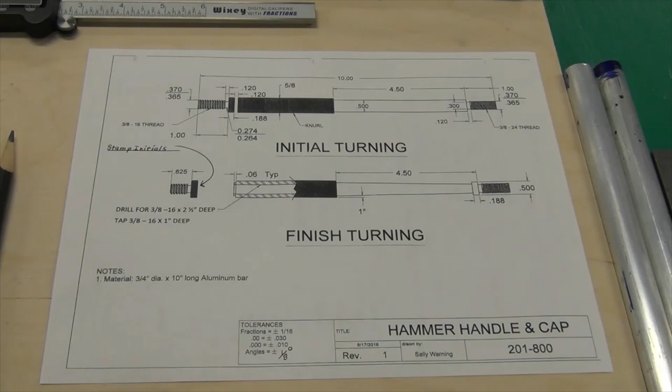In all machine shops, they have decimal equivalence charts hanging up throughout the shop. This is one of the two that we have hanging up in our shop, and the information we need is right here in this location. For drill and tap size is what we need to know, as far as the drill size to use for this tap tool we have on our print.

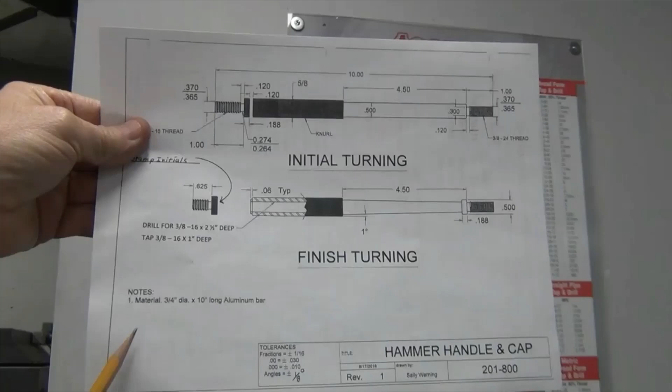As you can see, it says drill 3/8-16, 2.5 inches deep, tap 3/8-16, 1 inch deep, but it doesn't give out the drill size to use. We go to a decimal equivalence chart such as this to look up the information.

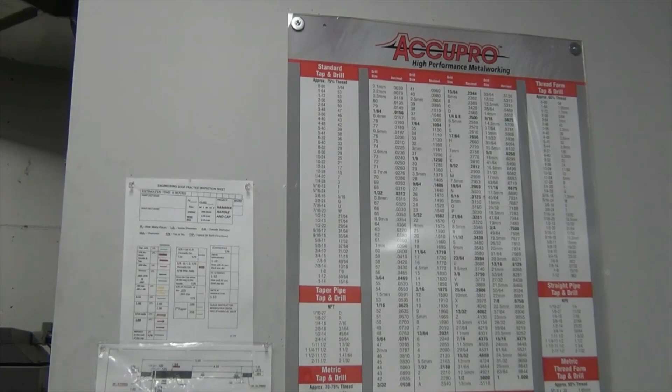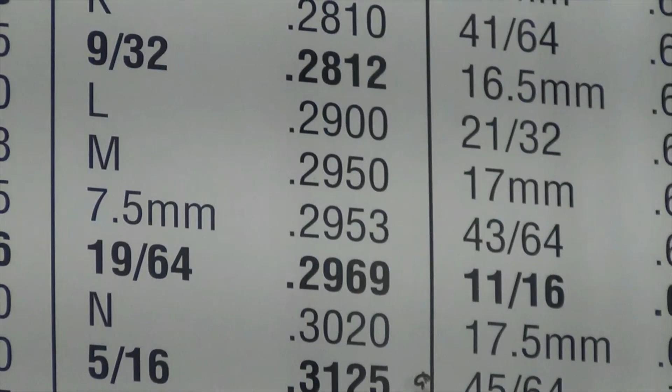So if we zoom in on 3/8-16, which is right here, you can see that it takes a 5/16 drill to make that hole the size we need. So if you scan over here to the decimal equivalence chart looking for the 5/16 drill, hopefully I'll be able to find it right away. Okay, 5/16 drill right there. It says the decimal equivalent is .3125, or 312 thousandths.

What we want to do is write that information down on our print right alongside of that.

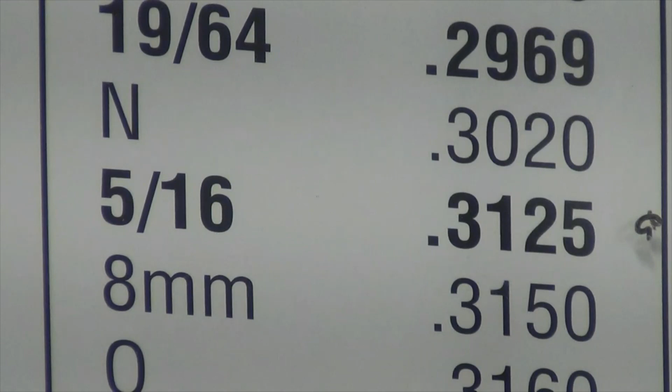Now we have written down here our 5/16 dimension, which is 312 thousandths. That's the size drill that we need. And also we've written up here the 0.625, which is 5/8 of an inch diameter, and that's the diameter that this is going to finish up at.

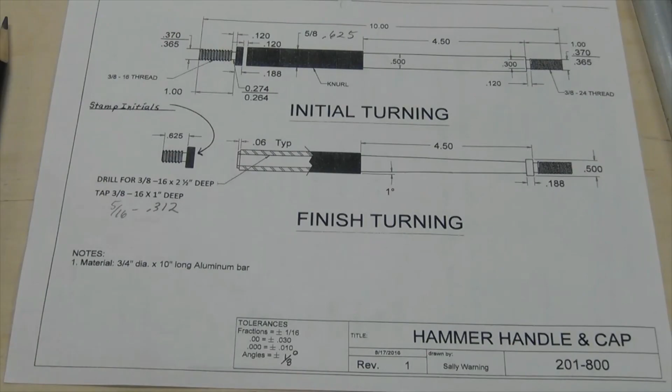This is one of our standard trainer South Bend lathes we have in the shop. It is pretty forgiving because it's a belt drive machine and it's real friendly to use and operate. I'm going to go over some of the basic components with you right now.

This would be the headstock here up above where all the gear mechanism is for the headstock and where the chuck is located right up against it. This here is our gearbox down here for both metric and imperial threads. It does have a forward and reverse switch and an emergency stop button.

As we go along, this is what they call the bed of the lathe. This long thing that goes across here is the bed. This is the carriage—some people in some training videos call it the saddle. This is a cross slide here that goes across. This is your compound rest and your tool post holder, okay, that'll hold the tooling that goes in.

Back here we have our tailstock, and down below we have a drawer that we keep all the necessary wrenches and stuff in to operate the lathe itself. A couple extra drawers below, one being for students' tools, so their tool bag is not exposed and where they'll trip over it, and storage on the other side for other chucks and different components that'll go into the headstock.

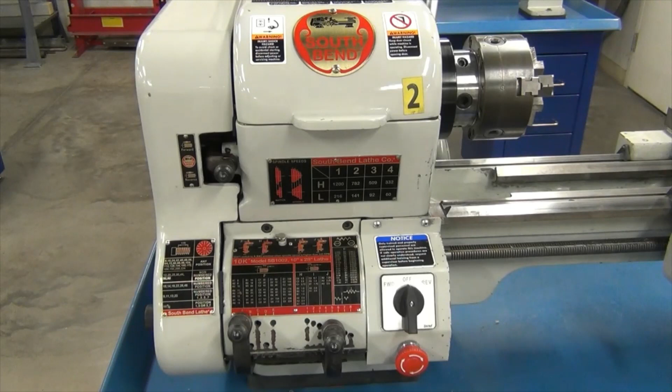I'm going to go over now each particular component of the machine and what its function does. This is the headstock up here. If you open the lid, you kill the power to the machine where the machine now cannot run. Even if you turn a switch on and off, it will not operate.

Here, this is the door to open up, and this is the pulley to change from high to low range. So this does the individual speeds across here, and they have a high and a low range. If you disengage the belt—this is spring loaded so the belt comes loose—you can change it from high to low range and move the belt wherever you wish for the desired speed.

Every time you open the lid or open this door, there are kill switches which kill the power back there, so you cannot get hurt by that being open. The power's cut off at the breaker.

Okay, we'll close this back up. We'll close this one back down. Now I'm going to leave this belt not engaged, because every once in a while a student will do that, so when I turn on the power, you'll see what happens if that belt's not re-engaged.

This changes the direction of the lead screw, which powers the carriage for whatever we want to do with the power feed. Up position turns one way, down position turns the other way, and neutral is off. We arrange this for whatever amount of feed we want, or if we're cutting threads, whether metric or imperial, we can set this accordingly.

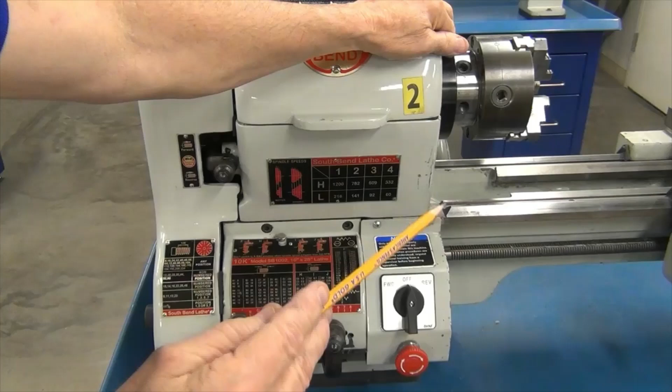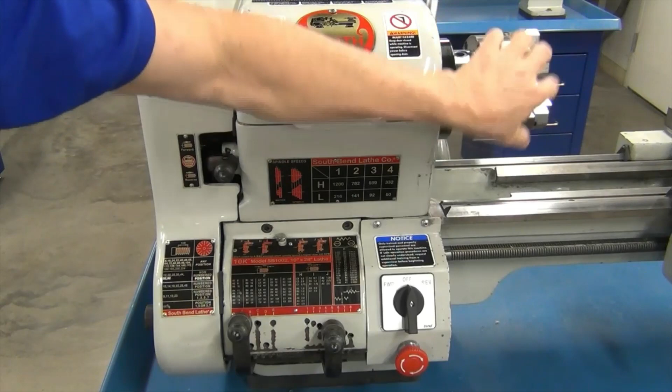Do not put your hand in there to stop this machine. I do wish it had a brake—a lot of machines do, where impatient people can hit it and stop the machine, like on the vertical mill, but this one doesn't. Don't be tempted to put your hand in here to stop it. This is a finger-breaking device; if you get your finger in there, it's going to break it cleanly and nicely.

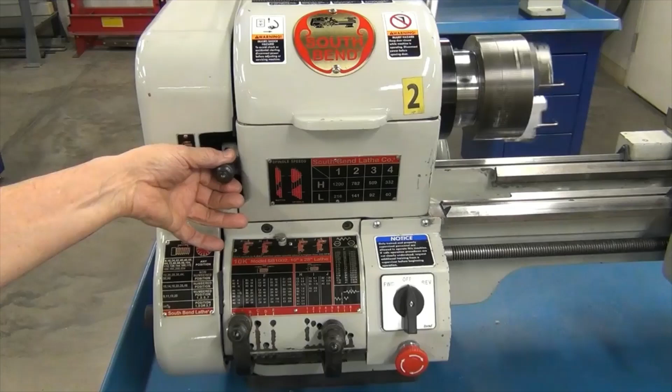Now, we can engage our lead screw and turn it on. You can see it runs in one direction. Turn it off, and we can disengage the lead screw so it's in a neutral position. We wait for it to stop because we don't want to grind the gears, then we can put it in the other direction, and now it goes the other way.

In the forward direction, the spindle spins towards us, which is mostly the normal direction for turning and cutting, but it does have the capability of going in reverse. You cannot just throw it into reverse while running the other direction, because it will just continue to run, similar to the vertical mill.

If we have it going in reverse and shut the machine off, we have to listen for the click. If you listen closely you'll hear it, and then we're allowed to turn it in the other direction. Now we're going to slow this down a bit since it's wide open down here.

We're going to put it right in there. Sometimes if it doesn't want to go into gear, you just spin this a little bit because the teeth aren't quite lined up—give it a little turn and it'll go into gear with no problem. Now we're going to move on to the next component.

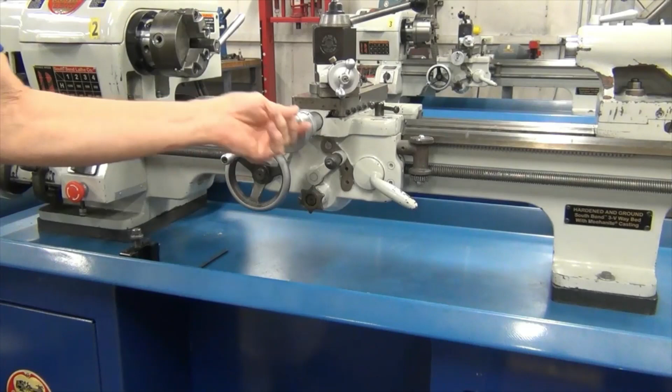This is our carriage on the machine. This will crank it this way, and this will crank it that way. It can also be manually cranked this way as well as that way. I've loosened the screws on both sides to show you that this can swivel 360 degrees, so we can put it wherever we want it to be.

Generally, when doing turning operations, it's not a good idea to have it vertical like this, though some people in their machine shops think it's fine—that's well and good. Personally, I like it about right there. There's a mathematical formula that if you put it at some angle in this general direction, it changes the ratio of how much you move this versus how much actually goes in. But for convenience, I like it right about there. If it's over the top, it gets in the way of what you're doing, so right about there is nice to have it.

Okay, I'm going to spin it over here. This is our tool post holder. As we move this handle, you can see this go up and down, and that locks our tooling in place.

So if this is over here, and this is locked in place, I'm just going to snug this up for demonstration. You take this, open that up, drop that down, lock that in place, a good snug pull on it, gets it there. This here determines the height of it.

On our machine, we have a particular block we can use right here. This particular block, we can set the height of the tooling as far as from this distance, as South Bend, from here up to there, to set the tooling height for center. The other one is for one of our other machines we have somewhere else.

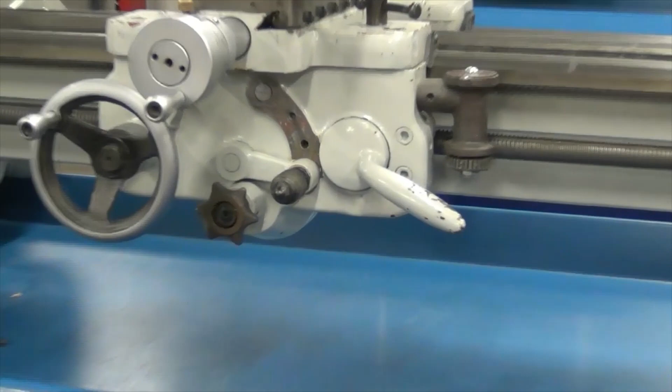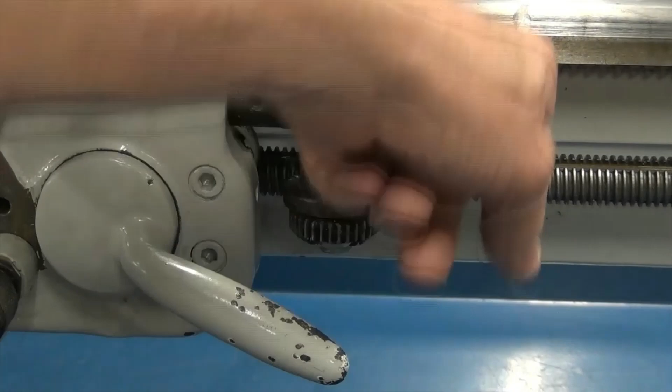Now, as we move along a little further over on the machine, I'm going to zoom in a little. There's this little guy right here. You can swivel it, and this little gear will go against the lead screw, and there's a little threading dial up here with graduations on it that engages this.

When you lift this up and engage it, it'll start cutting threads. Whatever we told it to do as far as the speed of this screw down at the end, when this is engaged, this gearbox will turn and go down like this, engaging these grooves with this little gear, and it'll cut whatever thread you wish it to cut.

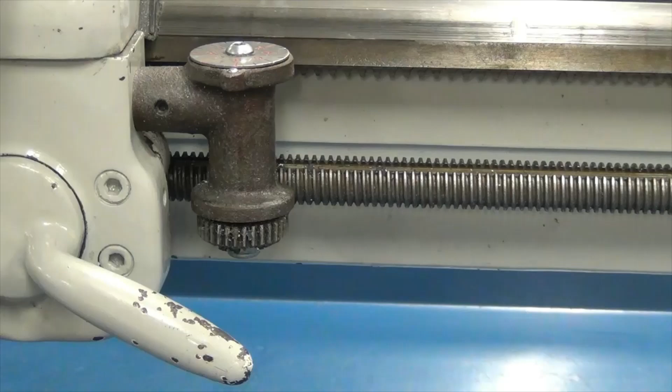Now I'm going to take it to the tailstock. The tailstock is meant to slide back and forth, in and out of your way as needed. When you want to put it in place to use it, you put this wrench on it, the yellow handle wrench, and tighten this screw, which draws a plate up on the bottom and locks this in place. Now it can't be moved.

I tell the students, and I warn them about this, that when you want to loosen this, you take this wrench, and loosen it up about a turn or so, just enough to make that plate go loose on the bottom.

It'll slide really nicely back and forth. If you loosen this a whole bunch of turns and that plate gets crooked and caught in there, you'll forget how to swear but it'll all come back to you, because that's a bear to get back up there and in where it needs to be. So we just want to loosen that a little bit to get this to operate.

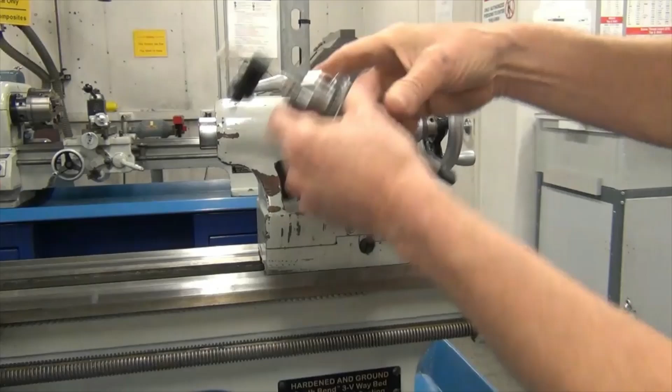Now once we got it in place, this here is our drill chuck, okay, that goes in with what they call a Morse taper. We clean this out, make sure it's clean, wipe it off with our hand, and when this is screwed out a ways, that will stick in. We know we got it in there properly when we can pull our carriage back and forth like so.

Now, when we want to get this out, we just crank our handle back here, and as we crank it, you can see this will pop out. There's a little piece on the inside that pushes on that and pops it back out so you can get the release. By the same token, if it's back here, you can't put it in and it won't stay. So you've got to bring it up past that point of the knockout bar, stick it in, and when you can pull it to and fro, you know we have it in properly.

This is our chuck key for our drill chuck that we can put in here and tighten or loosen our drill chuck. That goes like so as we go around.

This here is a lock. I encourage students not to mess with this, okay, because there's no real reason why we need to lock this in place on our particular jobs or projects. And if you snug it and lock it up, it can give you a false sense of security on one of the operations where we have to keep a snugness against our center. So it can really do a little bit more harm than good as we're going along until you're totally familiar with the machine and understand the various ins and outs that go along with everyday use of it, okay?

We also have, in our drawer, what they call a live center. Again, we're going to be wiping that off, putting it into the hole, pulling it to make sure it's in place, and we'll be using that through our job as we go along.

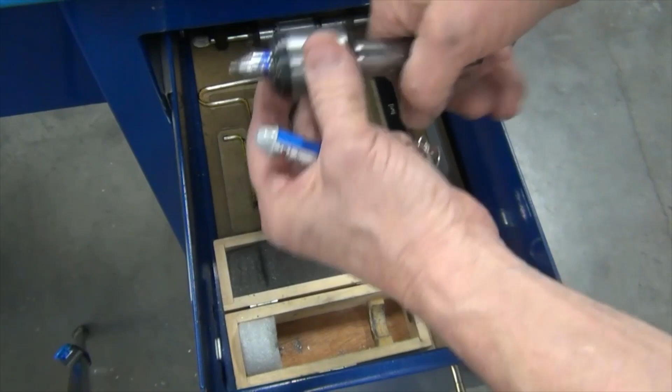What we have in the box, like we spoke of a moment ago, is our live center that we will use through various times of our project. They call it a live center because on this end it spins, okay, and it helps steady our work. This here goes in our tailstock, and we keep it in this little wooden box.

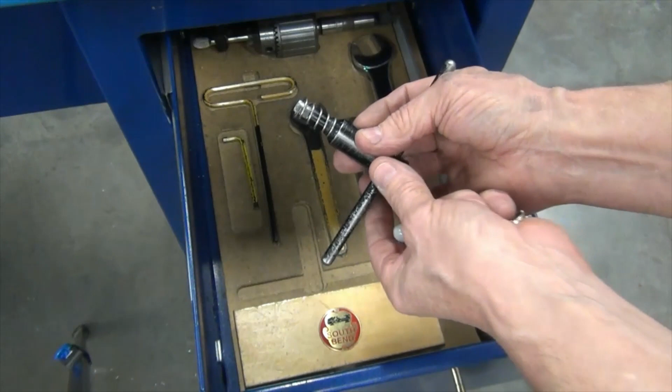Then as we go along, this is our chuck key, which we'll be using in our chuck, and I'll show you that in a minute. One of the most important things about this is the spring on here. Whatever you do, don't take that spring off. That's bad juju, okay? I've been here 6 years at the school, and I can count on one hand how many times a student has taken this off behind our backs and used the chuck key without the safety spring, then turned the machine on with the chuck key in it. Three times, okay, and all three times we were lucky and fortunate that no one became injured in the incident. The safety spring is on there for the students' protection, and they're encouraged, they're insisted, to leave that on there during operation.

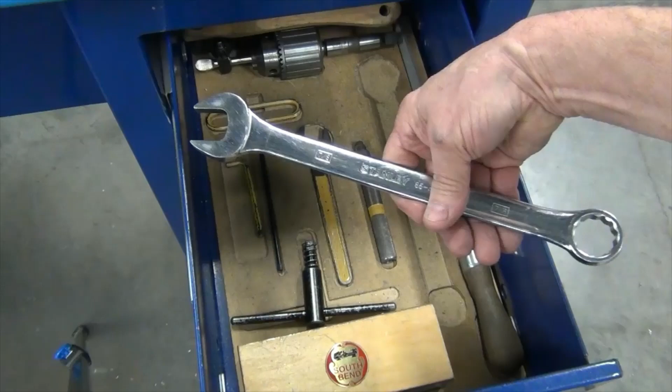This is our yellow-handled wrench for the tailstock. This is our chrome wrench, I refer to it as, to tighten up our tool post holder on the machine. We encourage everybody to use the boxed end on it; it's a lot easier to use. And our drill chuck for the lathe.

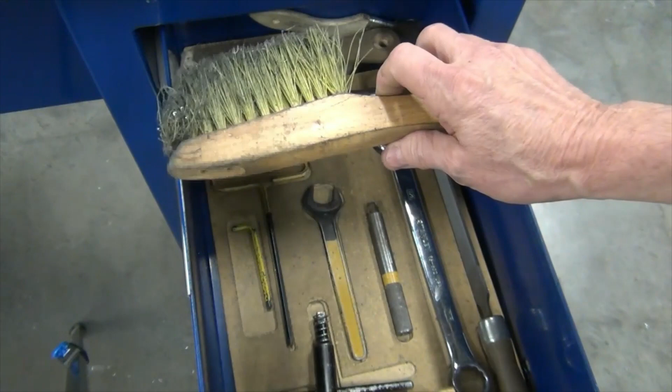We do have in here a brush. That's for the bed of our lathe, the blue thing, to clean it out with. We have our file card, which we use to clean out our file when it gets dirty, when we're doing our filing operation.

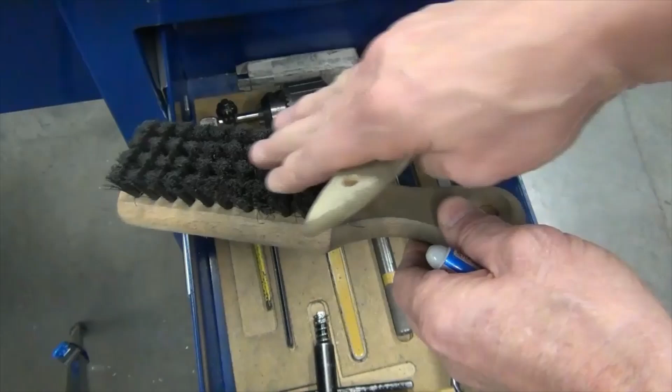And we have a paintbrush to brush away chips. Under no circumstances is the file card to be used for a brush. This is not a brush to be used on a machine, just on the file. In fact, it's a good idea never to rub your fingers or hands or get any oil in this brush whatsoever, because that hurts the use of this. Once you get oil on your file, it does not work as well as it should. It actually does more harm than good.

Now, we also have a file in our drawer at each machine as well, and we have what we refer to as a little cheater bar. It's got a hole drilled into it, and I'll show you as we go along what that's for. Our T-handled Allen wrench goes into the side where our compound rest is, where we can spin it to loosen it. And this little Allen wrench used to be to lock the carriage, but we just made a change on our carriages where we have the handle already there to fix that.

Second drawer down. This particular drawer is for the students who put their bag of tools in where they can access them and they're not sitting on the floor.

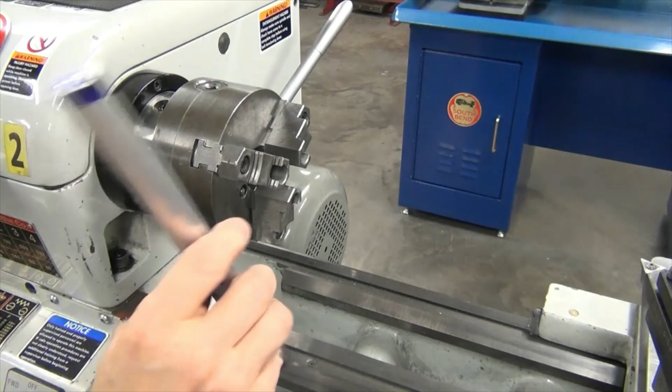Now we're going to go ahead and get started. We're going to go ahead and put our bar in the machine, slide that on in. What I tell the students, stick it out about 2 fingers. And this is our chuck key that goes in the top.

As you can see, it's got the spring at the top. That spring's to do one particular thing. When they let go, it's made to fall out on the floor so that they don't leave it in there by accident. If they force the spring off and put it in like this, they can put it in like that. Then they'll turn the machine on, and at 600 RPMs, that comes flying out towards them. Like I said, there's no reason for them to take that spring off. That spring is in there for their safety to stick in there. If they want to snug it up, they can bring it down like this. Make this good and tight, okay?

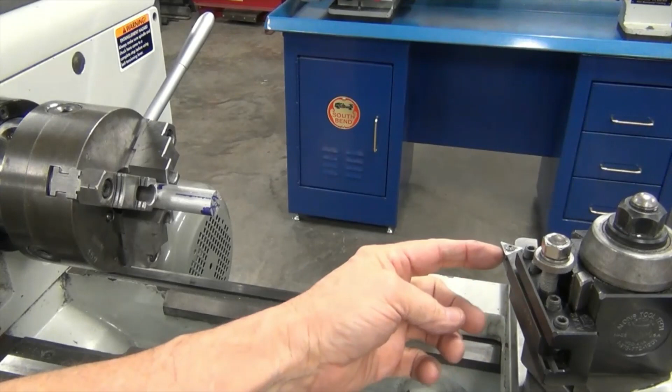And then they're going to bring their tooling in. Our tooling's at a slight angle like this in order that when we go to cut it, it just cuts with the cutting edge itself and doesn't create any drag. I'm going to go ahead and bring this on up, then reposition the camera.

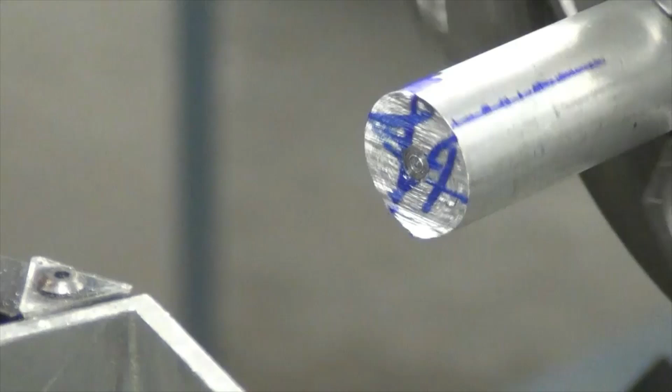Now I went in and touched the tooling to the work, and you can see we're not on center, we're just a little bit above. So if we were to take this here and double check ourselves, we can see that our tooling is above what is recommended for the height of where our tooling should be. Now, I can bring it down to that.

Another thing is we really don't need that plate. What we can do is we can take and see when we're right on center. We should be able to take and cut this all the way off. I'm going to put a little blue on there. We should be able to cut this all the way off till it goes right down to the center itself. So what we're going to do is we're going to take some cuts off of there.

I'm going to go ahead and crank this in a little bit, and I'm going to show you what it looks like, because I want you students to do this all manually. As you can see how that tool is cutting like that and taking that chip off.

I'm going to stop it to show you what I'm doing on the other side. It is generally not recommended to shut the machine off with the tooling touching the work, because it'll chip the tooling, but on aluminum it's a lot more forgiving.

Now, as the machine's turned on, I'm going to show you what I'm doing with this particular handle here. To make those chips produce there, I'm turning this nice and slowly and consistently to make those chips come up right there on the cutter, as you see, right up here.

Now we're going to go ahead and do another cut on the machine, and I'm going to show you what that does. We'll take and bring this on back. I'm going to advance the carriage in that direction just a little bitty bit, just a little, okay? Stop the carriage, and then I'm going to continue to crank this across.

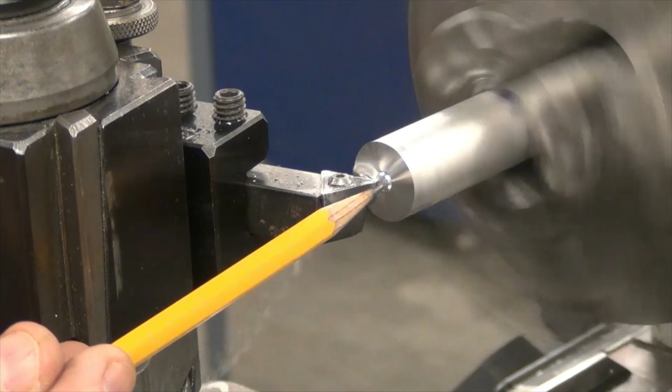Now this only cuts down to the center, okay? I'm going to shut it off a little earlier to show you this. Right now we're very close to center. I'm going to turn it on and feed it manually the rest of the way. As I feed it across manually, you can see we got down to the center.

When we're turning a face like this, anything from the center to the back side does more harm than good. So once the center is gone, you are finished with this.

Now, you can see that the finish is really nice across there, and I'm just cranking it back out nice and slowly. But in a lot of cases, the best finishes to get are when it's pushed into the work just a skosh, and you bring it back this way manually. It kind of gives it your best finish. Don't ask me why, it's just that I always found the finishes on the way out are a little nicer than they are on the way in.

Now, the one thing that's bad about doing it this way is that it drags the burr up. This is like a knife edge right there. So you got to be careful not to put your hand on there and feel that. That will cut you wide open, and you'll want to use one of my good Band-Aids, okay? Because that is sharp right there at that edge.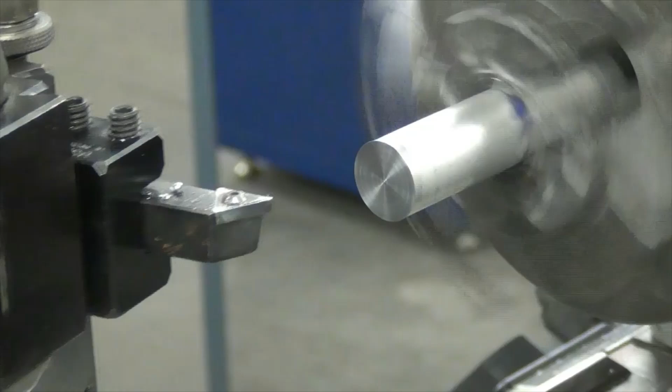So, what we can do if we want to get rid of that is we can take our file left-handed. Your right hand always touches here, your left hand touches there. We just hit it a little bit, like that. Now it's all clean on that end, ready to go.

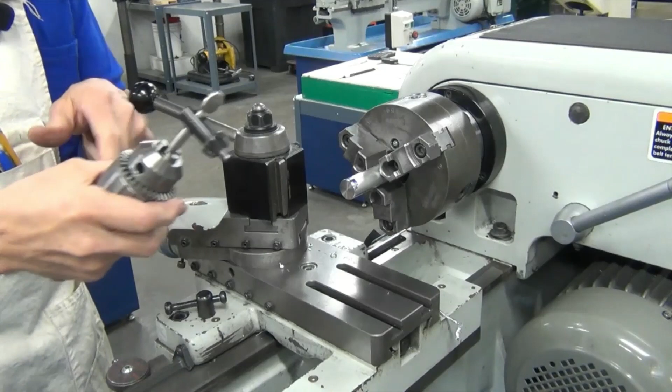We're going to be taking and doing some work with our tailstock on the end of this part. So we need to bring this up and make sure that we can spin this manually without running into anything. If you should desire, you can disengage this and take this out of the way. But bring this up, and what we're trying to do is clear this drill chuck, make enough room so this drill chuck can fit in here, okay?

Now, we've taken the drill chuck out of the drawer, we've cleaned it off, we make sure that the hole in there, and the taper, is pinky clean. We crank this out a little, we engage that. We pull a little bit on this to make sure it's where it's supposed to be.

This is a center drill. It's the same on both ends, and it's made so that we can use this particular device to support that work. The taper on this is the same as the taper on the top of this. When you want to know how deep to go, there's an illustration on our whiteboard that's on there all the time that says how deep we go, a certain depth.

I'm going to put this up in there. Now we have to tighten this up in there like so. Good and tight.

Now we're going to turn our machine on and we're going to begin to use that center drill. As we go into it, we start cranking it nice and slowly in to get a chip like that. And what we're trying to do is crank it to a point where the taper is what we're looking for.

As we begin to get closer, let me zoom in on that. We begin to run up this taper, okay? Now, if we get up to where this taper's edge is, that's going to be too far. So we're going to go a little more. As you can see, I'm bringing it in, cutting a little more out. I'm going to back it off, get rid of the chip, and change the angle.

Now, the viewing angle is a little different on this side. And what we're trying to do is bring it up where we're just below full diameter. So right about there would be good.

That's how big around we want it. We want to stop it before it gets all the way up to the top of that taper, because we're going to be actually guided and supported by the taper itself.

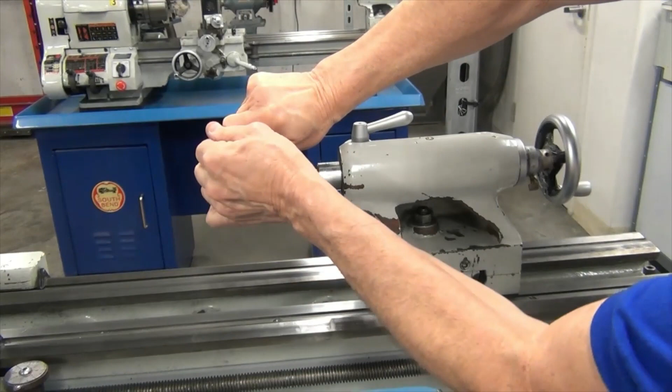We're going to go ahead and take our tooling out of the drill chuck, like this. Now, if you need a little help getting this in or out, that's where this little bar comes into play. It's got a hole in it. You can push that over there, to make this tighter or help to get it unloosened. Okay, you'll take this out of there first, then take this out by cranking the handle back until it pokes it out.

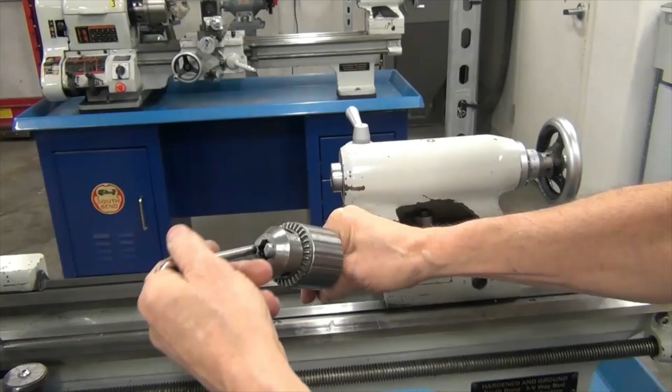We'll put our chuck key back in just for storage. Now we're going to take and go ahead and put our center in. So we'll clean it off good. Take our pinky, make sure there's no chips in there, bring this out where it sticks, pull it, we're good to go.

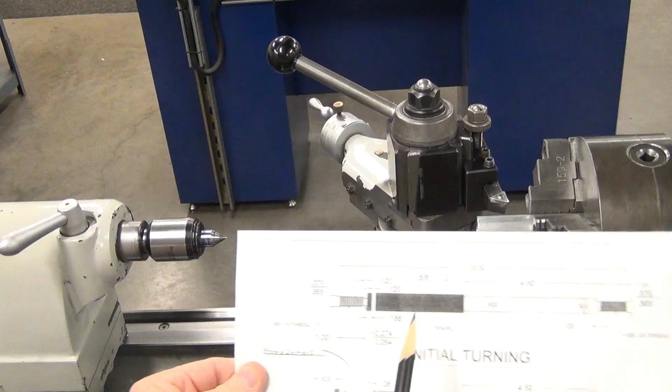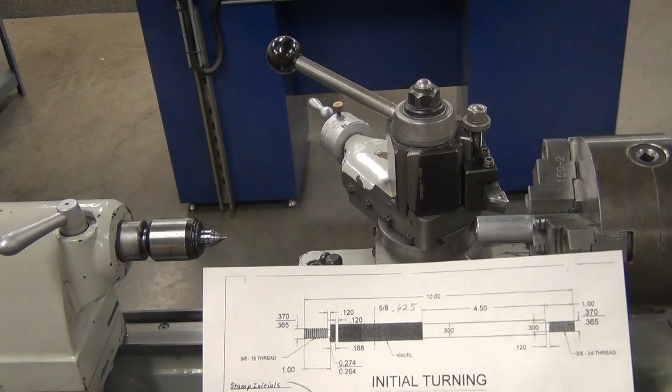Now we're ready to turn the 625 diameter. What we want to do is make that 625 diameter turn an inch further down than we need so we can put this particular diamond shaped pattern on, or knurl, from here to where it ends. So I tell everybody to come around to the back of the machine where we can see it sticking out as it would appear if we were on the other side.

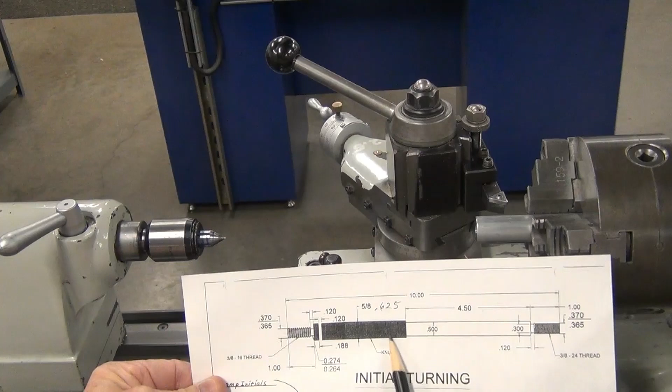So what we want to do is take our 10 inches and add an extra inch to the dimension from here to here. If we just deduct off this inch here, say 4.5 inches, so 4.5 inches from 10 gives us 5.5 inches from this end to a spot right about there. Then we can turn the 5/8 diameter down, and in turn also run our knurl up past where we need it to stop, so we can bring this back up and make a nice clean edge where it ends.

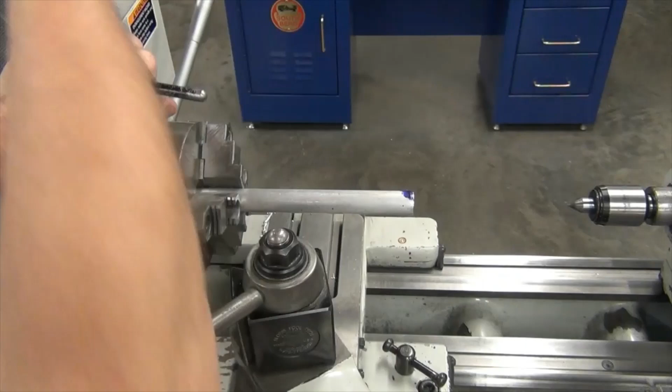We'll go ahead and bring our center up till it touches. We'll tighten our nut underneath to lock our tailstock in place, good and tight. Then back here on our tailstock, we'll bring this up and snug it up, just a good snug like this.

Now, as we come back across to here and turn our machine on, what we want to see, we put blue marker on this intentionally because we want to see that spinning. At any given time that stops spinning, that's bad juju. That means this is not supported anymore, because whatever we've been doing has been taking this bar and shoving it in there, or this here has been coming out.

Now we're going to turn our diameter up to about there, because we're sticking out an inch more than we need, and if we turn this diameter up to the blue mark to 5/8 on the diameter, that will work out for our knurl that we want to put in.

Lock it in place. Take our big shiny chrome wrench. I hold, anytime you push on this, I hold on that, because you can push hard enough on this big wrench to overtake the set screws that are in here and spin this like a top. So if I push on that, I hold on this. If I pull this tight, I push on that. Okay, so push on that. I can loosen, turn this wherever I want it. I'm going to put it about that location.

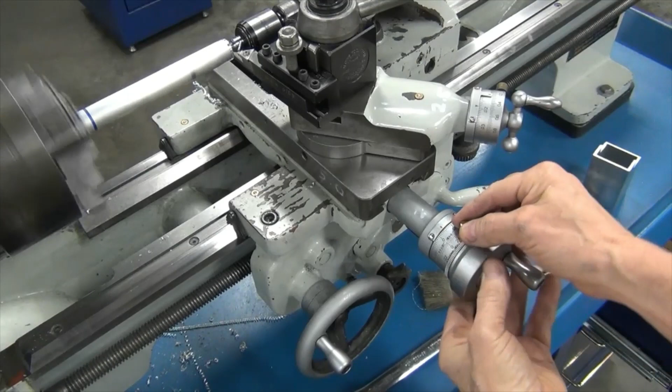We're going to come in here till we touch. Now, back over here on the dial, we can loosen this knob and turn it wherever we want. So we're going to take off about that much, just a little bit to get started. Now, if you look up there, you can see the chips coming off as they go.

Now, I'm going to shut the feed off. I've made the knob read 0. I'm going to back the tool out, away from the work. And I'm going to check my diameter there to see how big it is.

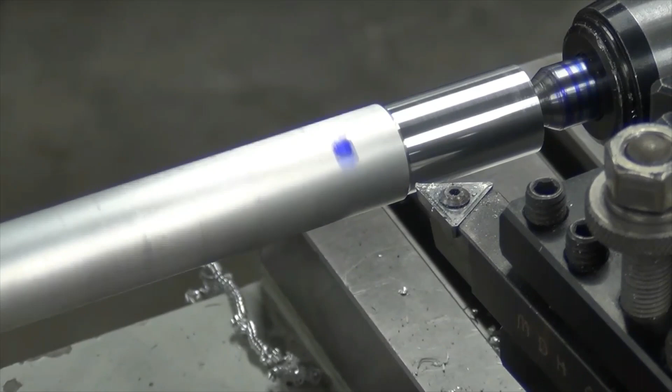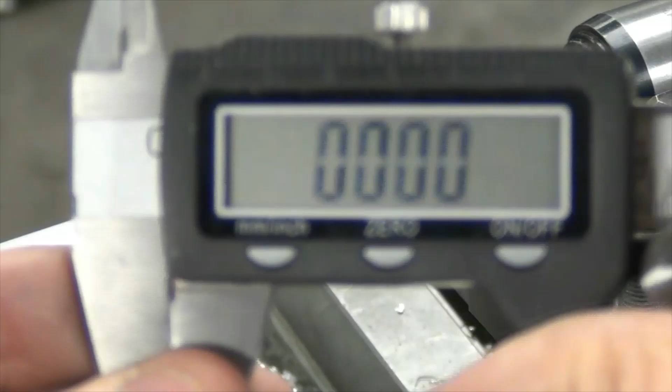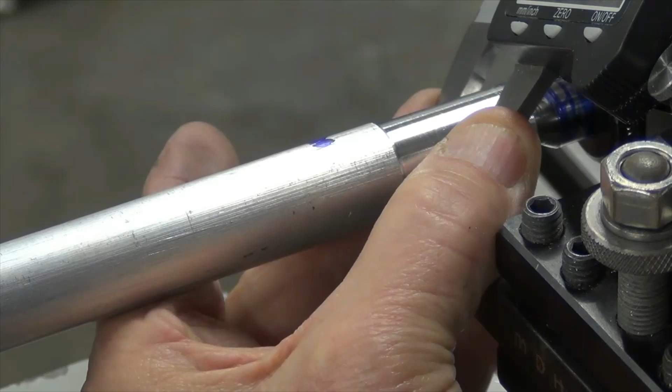We got our calipers, got them cleaned out, closed, turned on, double check our 0. Now we're going to measure how big around this is. Now, we can go like this, or we can lay them sideways so that we can look up and see what we've got. And as we look up, I show that to be 701 thousandths.

So I'm going to pull it off. You're showing about 703 on there. It was about 701 when I pulled it off. So that's where we're starting, and we're going for 625.

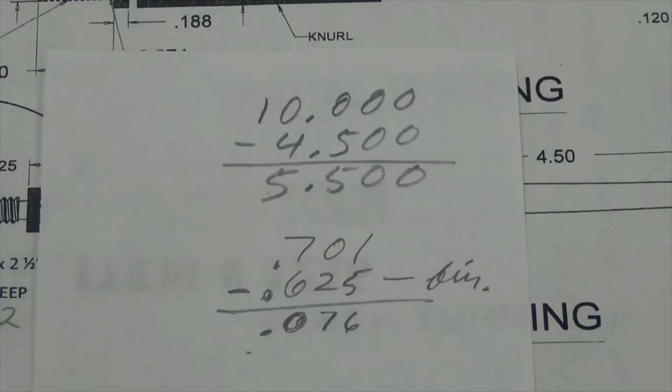Like I said, we measured it. We're at 701 diameter, we're going for 625 diameter. We subtract one from the other, that gives us 76 thousandths of an inch to take off. I brought the carriage back into where we left off on that diameter, okay? So we're going to continue that diameter on down to the finish.

Now I've reached my line up there on the machine. I'm going to go ahead and back it out. We left it off on 0 and shut the machine off.

It's kind of rough, it's not good enough for our knurling job that needs to be done. Like I said, when you're setting the tool up, you can tweak that angle in a little bit to adjust it to compensate for any imperfections of the tooling.

Sometimes the tooling, especially on a light machine like this, can influence the carriage feed to hesitate and stutter, which will make a finish similar to this. To compensate, we're going to adjust the angle of this tooling, tweaking it so all the pressure is headed back in this direction. A little more maybe wouldn't hurt.

Then we're going to come in and run the tooling in till it scratches. When I see it scratch, we're going to come back down to our knob here. I'm going to loosen our collar and bring it around to 0.

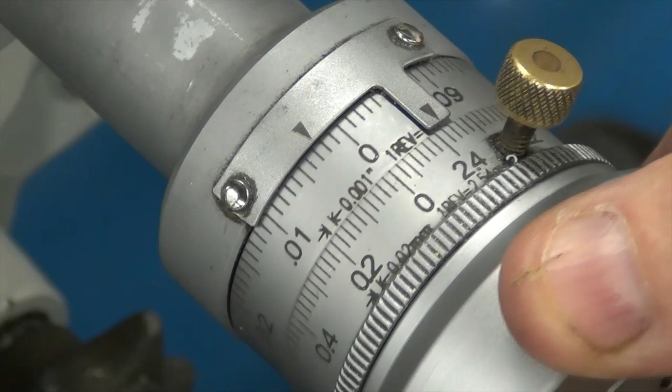We got 76 thousandths more to go. Each mark on here takes off 2 thousandths of an inch. Probably every lathe you'll run across in your life will only take 1 for 1 in this direction. Very few lathes I've ever seen or heard of take off 2, but these lathes are one of them. So 5 would be 10, 10 would be 20, 15 would be 30. We're going to take off 30 of that 76 more to go, give or take.

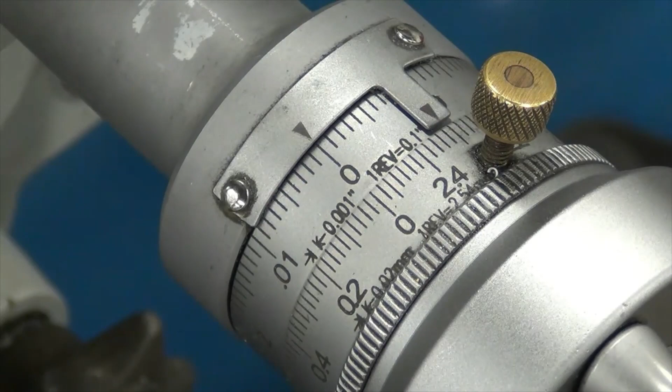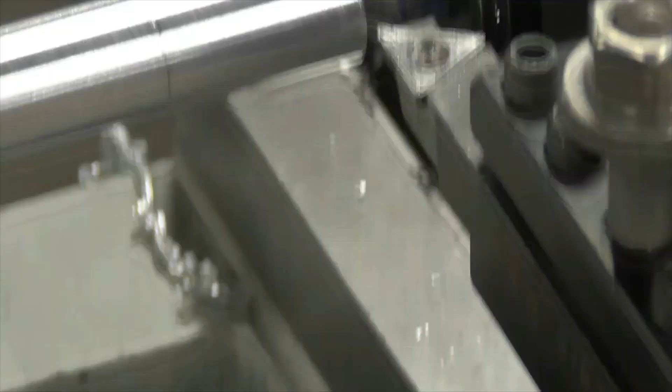We're going to turn our machine on, come back up to check to make sure this is spinning. I'm even going to touch my finger on it a little bit to make sure it's going round and round. We're going to zoom out, engage our feed, and begin the cutting process up there.

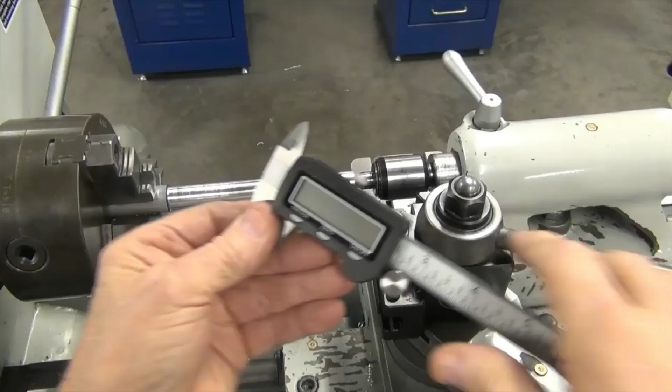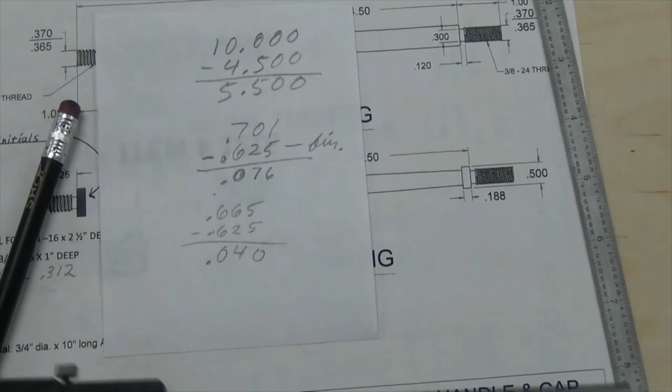Turn on our calipers, run them out, run them in, they're at 0. Let's remeasure to see where we're at. I'm holding them at an angle where I can see. I'm at 665 on the diameter. If you do the math, we got 40 thousandths more to take off. If we bring our dial back into where we left off, which is 0, we crank it over, we got 40 more to go. 5 takes 10, 10 takes 20, 15 takes 30. We're going to take another 30 off and see how we're doing.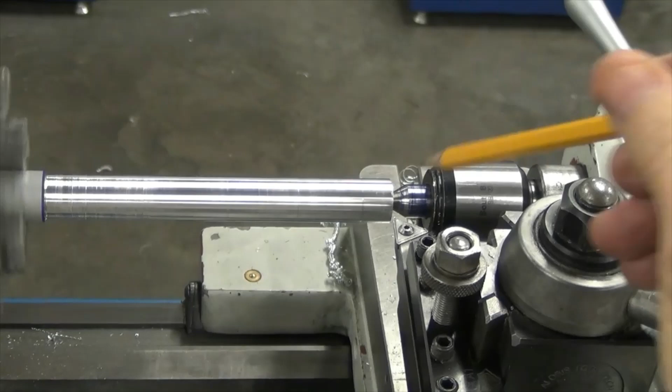Again, we come up here, make sure this is spinning, engage our feed.

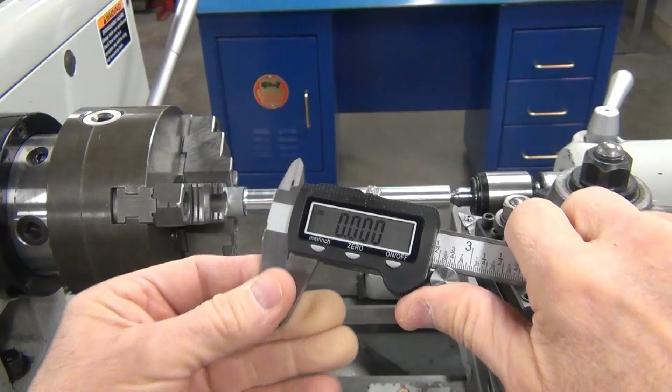Took the liberty off camera to take another pass or two off the part to give it a nice clean looking finish for our knurling operation, and working with the tolerance that we had available, going to go ahead and measure it. As we put our calipers on there, the measurement on it is .616 diameter.

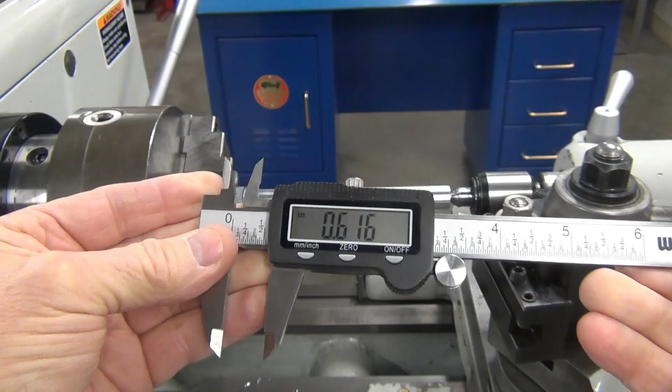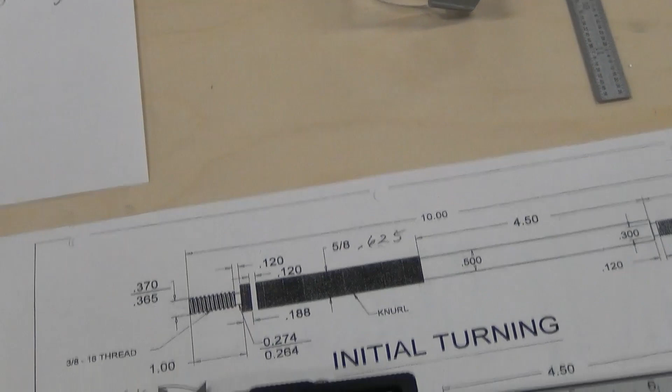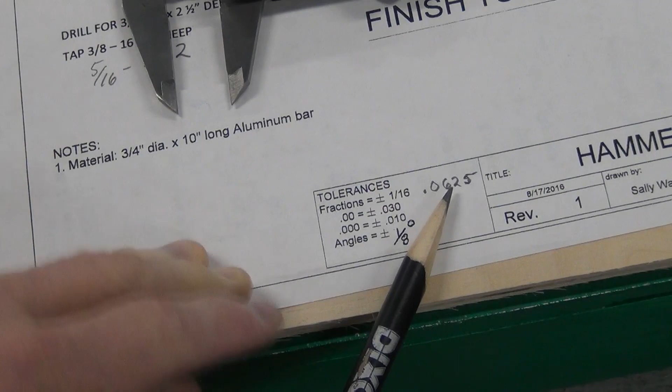616 diameter was the diameter of what the bar measured. Our nominal dimension was .625. Right now we're at .616 thousandths on the diameter. As we go up here, we see that particular dimension was in a fractional dimension. So as we check the tolerance on fractions, I took the liberty of writing in the decimal equivalents. On a fraction, we could be plus or minus a 16th of an inch and still be correct, or up to 62.5 thousandths plus or minus where we were in tolerance. As you can easily see, we're well within our tolerance, taking a little extra off, approximately 10 thousandths off the diameter to give it the better finish we need for the knurling operation.